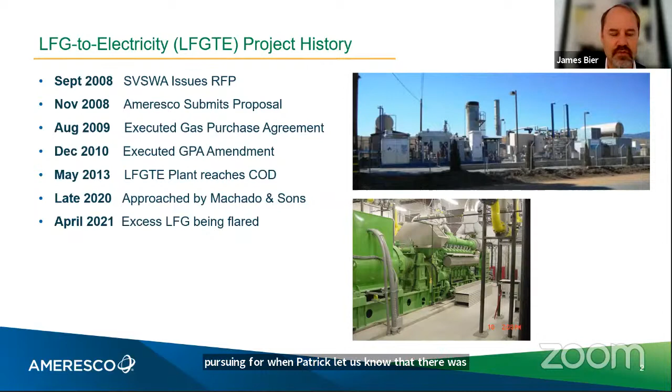Patrick talked a little bit about what the wholesale renewable electric market is right now. It would not facilitate an expansion of that existing plant. So we are looking at a landfill gas to renewable natural gas, or RNG, project.

This is a picture to the right of one of our renewable natural gas plants, actually in San Antonio. It's a relatively small plant, and the one at Johnson Canyon would be relatively small as well. We'd have a bigger footprint than we have today, but it's a lot of vessels, pipes, compressors, and things like that to remove all the impurities from the landfill gas and then inject it into a PG&E pipeline as renewable natural gas. So it's a very robust market at this time.

Ameresco is probably working on at least 15 of these projects across the country. We're one of the main players in this space, and I think within the next 2 to 3 years we will be the largest renewable natural gas producer from biogas in the United States.

So there are really 3 sources of revenue associated with renewable natural gas. One is under a federal renewable fuel standard, where you can generate a green attribute called a RIN, which stands for Renewable Identification Number. Somebody was not very creative when they came up with that acronym. But today's market for RINs is very robust, and that's the majority of the revenue you would get from this gas.

At this point, I'm going to turn it over to Sean Kilgrow and allow him to introduce himself, and then talk about how he's going to generate the biogas that we will combine with the landfill gas to make a larger project. So with that, Sean, it's all yours.

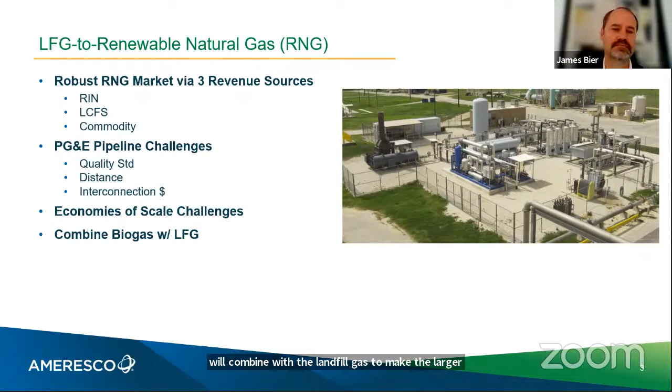Okay, thank you. You hear me okay? I can. Okay, a little bit about the company before I dive into the project. Machado and Sons is traditionally a site civil type company. We've done work in solar. Our primary customer is PG&E.

I do a lot of work up and down their service territory. I met Machado and Sons when I worked at Granite Construction. I was one of the original guys in at Granite for the renewable energy division. They were a subcontractor to me, got to know them real well, great family run company.

When this opportunity came up and we talked through it, we saw that 1383 was emerging. Even though this project doesn't relate directly to 1383, it does in an indirect manner, and we've attacked that market pretty head on. We are developing a compost site in Modesto and have other anaerobic digestion projects in development up and down really the Central Valley.

And this is the introduction to one of those projects. So we're calling this Salinas Valley Biogas.

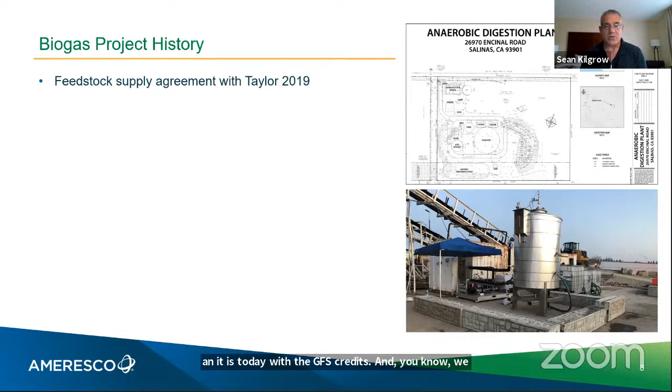The beginning of this was when I met with Taylor Farms, and we met at a Cal Recycle symposium. I have a background in anaerobic digestion going back years ago when the market was much more challenged than it is today with the LCFS credits. And we met with their sustainability group, and they presented me with this issue of the culls that they have to deal with.

When we looked at that, my first question was, well, do culls digest in a way that is going to be economically feasible? So we built the little test plant you see at the bottom there, and lo and behold, we got enough gas that we thought it would be economical to scale that plant.

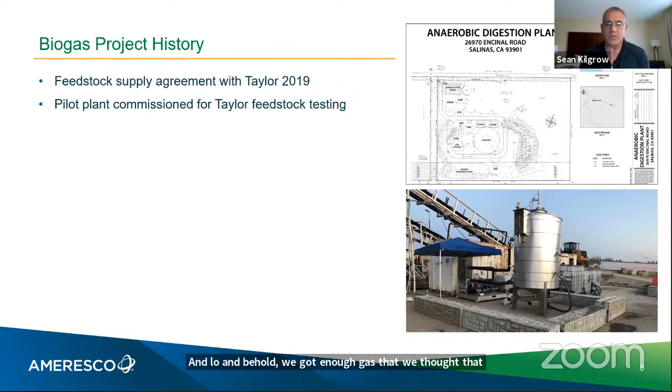What we did is we found a property in unincorporated Monterey County where we ran a full permit, full survey, geotech, did the whole thing, submitted to Monterey County with an in-vessel digestion plan. And just like Ameresco, we pumped into PG&E at that point, and the interconnection costs were just too high, and the reach of the pipeline was too far, 3 miles from the site.

So we had to abandon that site, and that's when we approached Ameresco.

So before we approached Ameresco, we did combine forces with an Austrian experienced anaerobic digestion technology provider. Their name is Biogest, and they've been great. They helped us with the permit application and the in-vessel digestion plan. You really can't do one of those without a technology behind you.

So we've built a team around this project, starting with Biogest and now sort of completing that with Ameresco, that we think is going to be a winning combination.

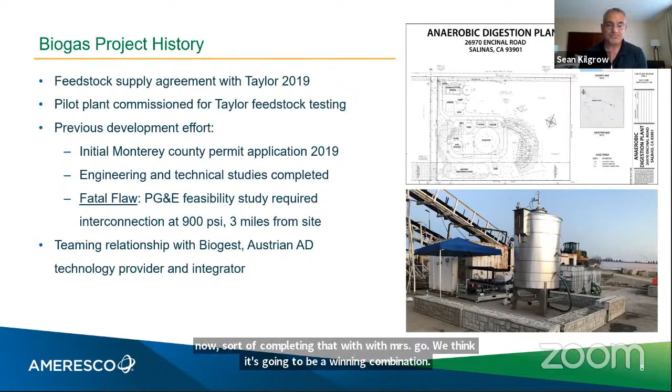And here's what we've proposed to not only Patrick but Jim. There's a site there just north and a little bit west of the landfill proper that is just about ideal for what we're trying to do.

With the amount of feedstock we have, which is 300 tons a day, it's under contract, which represents, by the way, about a quarter of what's available in the valley. Those two digesters you see there highlighted are what would handle that amount of feedstock.

But we can also expand. There's enough room there. We went out and looked at it recently, where the sort of the watermark you see there could be a third tank to include an expanded feedstock flow.

Just to give you a sense, each one of those tanks there is about 1.5 million gallons. So it's a pretty large tank. Call that 100 feet in diameter, 20 feet tall. So it's a robust, fairly large facility, but it's certainly within the bandwidth of the technology that we're bringing to bear here.

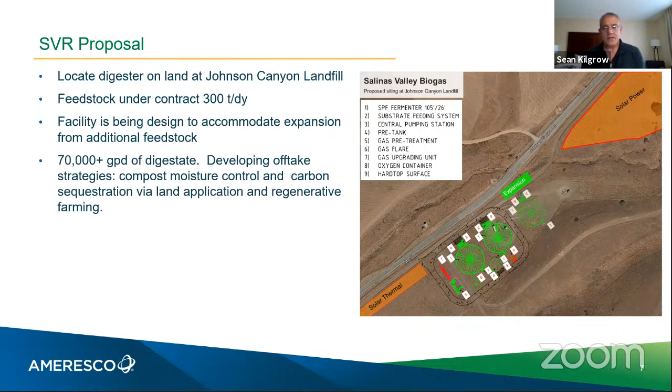One of the things we are running into is the amount of digestate that would come out of this, and that's about 70 to 80,000 gallons a day of digestate. If you can imagine, that's 2% solids type liquid.

Portion of that would go to the compost facility at Johnson Canyon landfill, and the rest of it we're looking for options. There's regenerative farming options, carbon sequestration in the soil. We've actually engaged UC Merced to help us quantify what sort of carbon can actually be sequestered in the soil. But I see that as one of the hurdles we have yet to sort of check the box on, but I don't think it's a fatal flaw by any stretch.

And the 1383, as I mentioned, it's not a direct compliance because culls are not diverted from the landfill, although those culls would not see the infrastructure that you've built to handle 1383 diverted waste. So that's the real benefit here to the landfill and to the region as a whole.

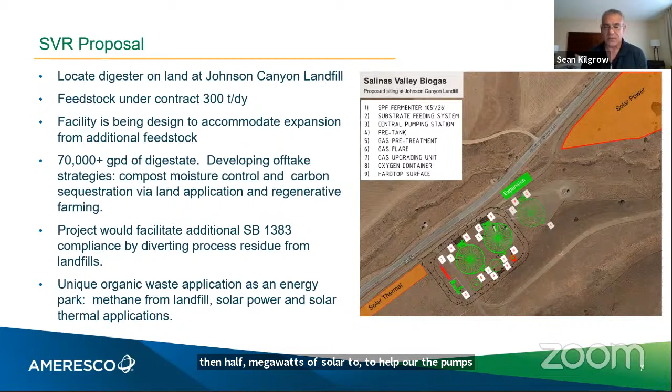As you'll see on the next slide, this is the layout we have here. The area we're proposing to lease includes not only the anaerobic digestion, but also solar thermal to maintain the heat balance in those digesters, which is key to maintaining optimal anaerobic digestion, and then 0.5 megawatt of solar to help power the pumps and infrastructure at the digestion site.

Really, the key to this slide is that there is room, and it is very appropriate for the application we're trying to accommodate here. The square footage fits very well with the amount of thermal load we have and the amount of electrical load. The larger square, 111,000 square feet, fits perfectly for the 3 digesters we're proposing. It's an ideal site for this location.

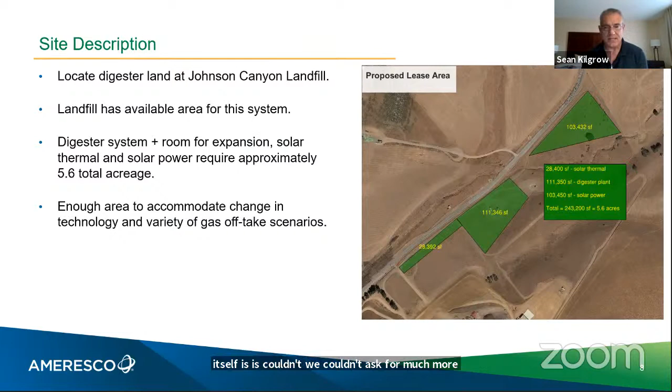Here's where we are to date. We've been working on this for a little over 2 years now. We have feedstock LOIs in place with Taylor Farm for that 300 tons a day, and we've been approached by more than one finance group. One group out of Europe has agreed that, if we check their boxes, they'll provide financing for this project.

We have an advanced design. This isn't as complicated as a landfill gas to electricity project would be, simply because we'll be providing the raw biogas to Ameresco, which makes the design much easier. For the tank design, we think we've checked the box on the latest seismic requirements, which are high in this area. The heat and electrical load are modeled and will be satisfied by the solar thermal and solar I've shown you. The detailed design and permitting effort are on hold, but once we have a blessing from this group to move forward, we can proceed with a full permitting effort.

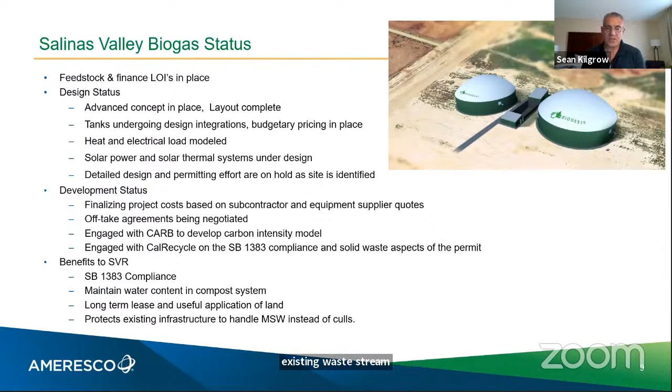This does provide the county the ability to continue with 1383 compliance with your existing waste stream. Water is always a problem in Monterey County, and we will provide enough water to maintain the existing compost system. For the county, this would be a long-term lease. Like Jim mentioned, we'd need 20 years to pay this project off, and the regional benefit of handling a majority of the culls coming out of the valley is good for the environment and the region, and creating biogas fits in line with the state's renewable energy goals.

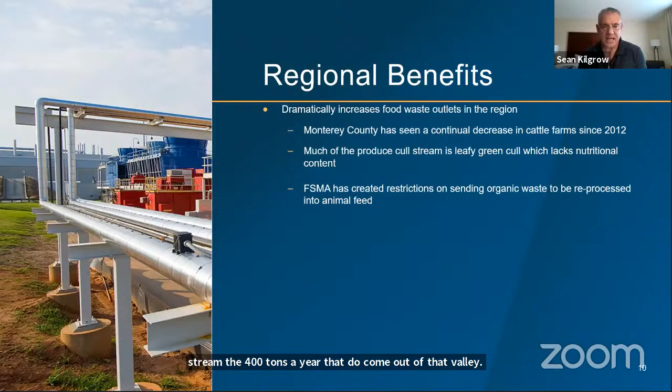This is sort of a repeat of what we've discussed, but instead of trying to build or permit additional infrastructure to deal with this waste stream, the 400 tons a year coming out of that valley, this is a very appropriate application. The regional culls here, 100% of that would be avoided, the landfill would avoid that material, which I think would be a great benefit.

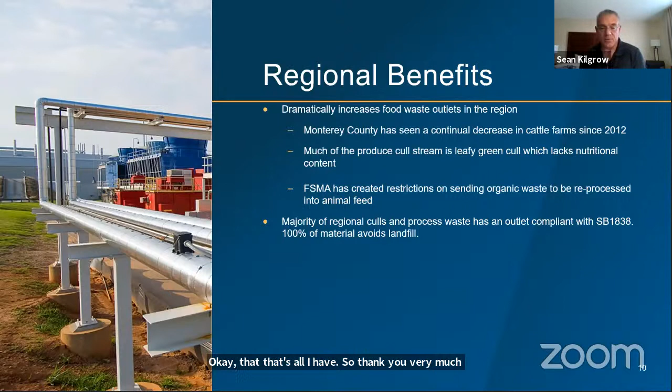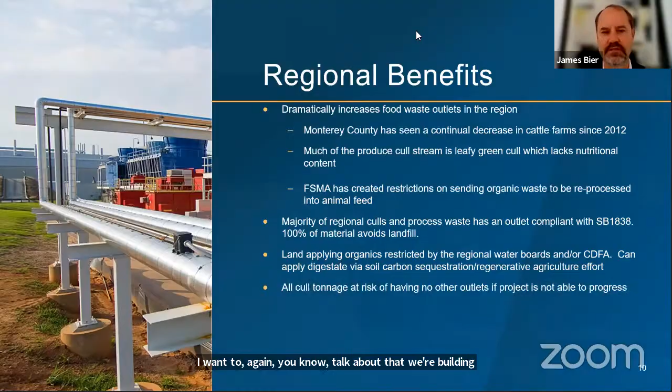Okay, that's all I have, so thank you very much. I appreciate everyone's time. Just to wrap up on the last slide, I want to talk about building on the successes we've had with the authority over the last decade. This is really expanding our presence and our relationship with the authority, and we look forward to it. I started off this presentation with a reference to a marathon roller coaster ride, and I don't think this project will be any different.

Hopefully it won't take 5 years. I don't think that it will, like the previous one, just because we know each other a lot better.

But I do want to warn the folks on this phone call that this is a marathon roller coaster ride, and that today we are closer to the start than we are to the finish. But Ameresco and our team and our partnership with Machado, I think is the right team to bring this project to fruition. And I look forward to working with Patrick and his staff and the members of the board in bringing this project to fruition. So again, I welcome questions as well.

Thank you, Sean and James. I'm going to see Patrick. Any other thoughts for us before we go to the board?

You're on mute there, Patrick. Yeah, just one last thought, and this does have to do with the city of Gonzales, as many of you know.

It is deep in development of a microgrid. I participated or listened in on a webinar today put on by the local government Sustainable Energy Coalition, and really it was all about the Gonzales project, and they continue to identify the landfill gas, biogas as a possible future source for some of their energy needs in their expanded business park. So we are keeping that in mind.

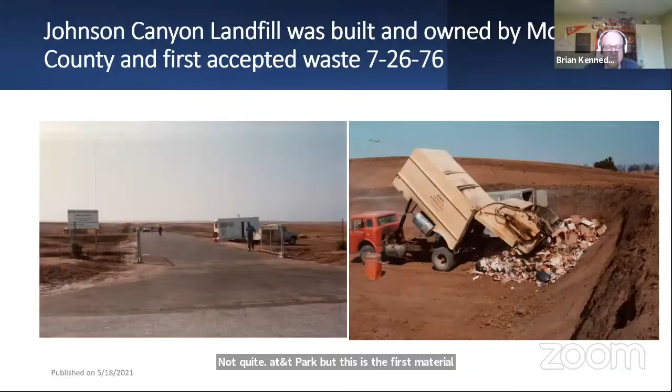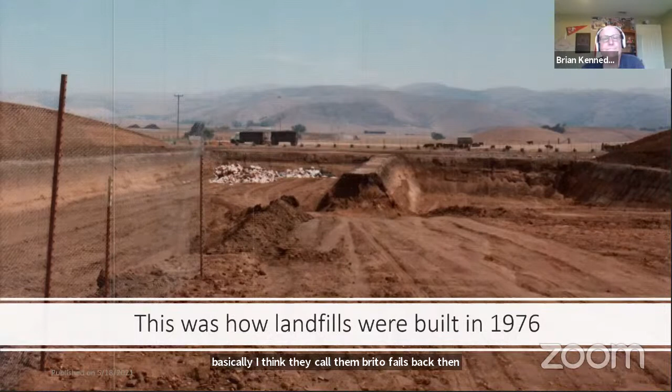So this is how we were landfilling in 1976. It was basically, I think they called them burrito fills back then. You would just bulldoze out some troughs and fill the waste in there, and we would cover it. Next slide, please.

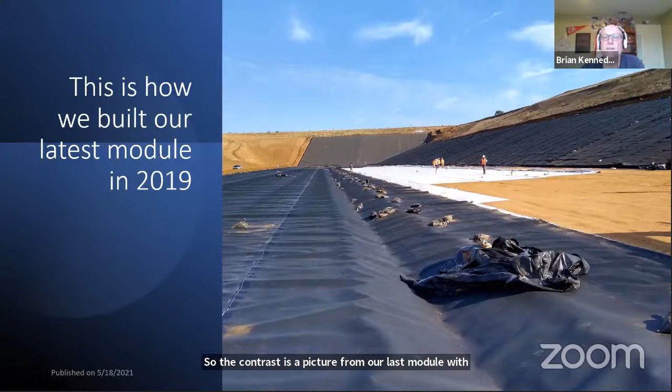In contrast, this is a picture from our last module we built, which is module 7 in 2019. You can see quite a bit of difference there as far as the environmental protection. Next slide.

So modern landfill designs have many features to prevent environmental degradation. Leachate, which is liquid that comes in contact with garbage, is protected from, or prohibited from going into the environment. There's a multi-layer baseliner which is used to prevent this leakage, and the collection system with pumps that remove the leachate. When the landfill is closed, a similar liner system is constructed on top of the landfill to keep water out and prevent landfill gas from escaping into the atmosphere. In the case of Johnson Canyon, this gas, as you heard earlier, is used to generate electricity, as well as some of it now still being flared off. Next slide, please.

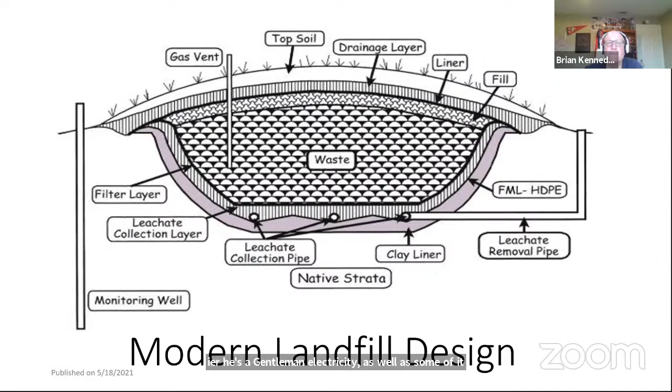One of the things we want to talk about tonight is the master plan. The master plan is a document that examines the short, medium, and long-term goals of the site, including modular design and sequencing, stormwater controls, and site closure design and timelines. Geologic Associates was retained to develop our latest master plan a couple of years ago, and the final plan is included in your board packet today.

Johnson Canyon has had 2 previous master plans, in 1986 and 2004. Master plans are typically done every decade or so. They're not required, but sites use them for planning purposes primarily, and you initiate them when you have different circumstances, different waste streams, different objectives. Next slide, please.

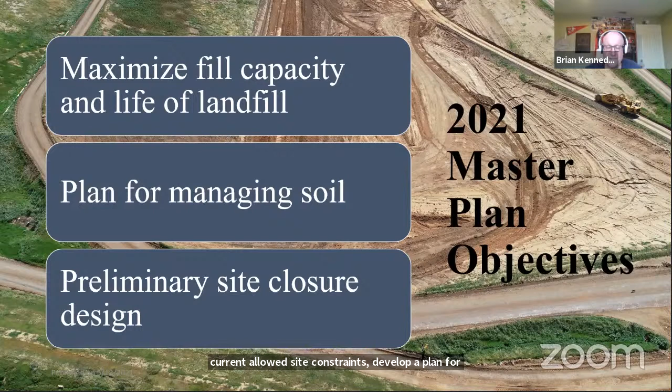So the objectives we gave to Geologic this time around were threefold: we wanted to maximize the lifespan of the landfill within the current allowed site constraints, develop a plan for managing the excess soil on site, and develop a preliminary closure plan. Next slide, please.

So the constraints on landfill capacity include the proximity to the property boundary, the height restrictions agreed to in the conditional use permit in 2007, and actually the weight of the waste on top of the leachate collection pipes themselves. Next slide, please.

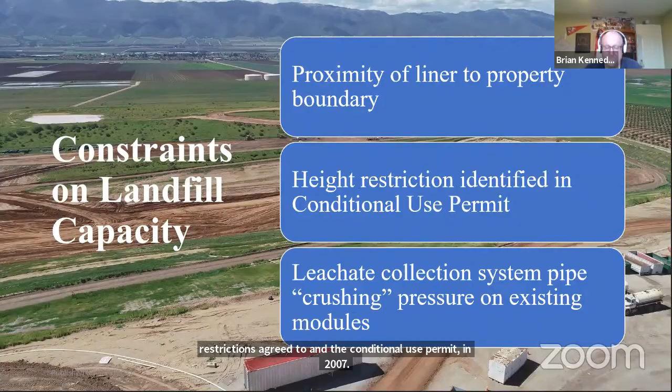So some highlights from this year's master plan. Development plan shows 3 remaining landfill modules for a total of 10. This is the same as we had previously, just a little bit larger.

And then we maximize the footprint of the landfill, which extends the life of the landfill. The design also added more contours to the final top deck to facilitate stormwater drainage and make the closed landfill fit in better with the surrounding landscape. However, the increase in capacity resulted in a whopping 2.6 million cubic yards of soil that needed to be managed. So the good news is Geologic came up with a plan to manage that soil.

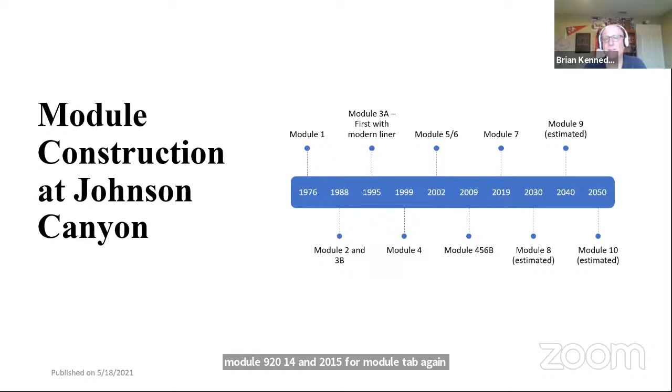As far as the module construction timeline going forward, we finished Module 7 in 2019. Module 8 is estimated in 2030, Module 9 in 2040, and 2050 for Module 10. Again, these are estimates based on current disposal rates.

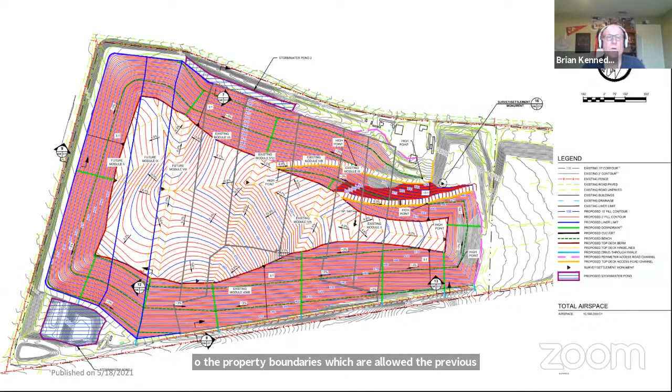So here's a design of the final map of the landfill after it's filled and closed. The waste limits on the north, the south, and the west are much closer to the property boundaries, than were allowed in previous plans. And then the top deck is a lot more contoured, fitting in much better with the surrounding landscape after closure.

So now we have the issue of the soil challenge. We have 2.6 million cubic yards of dirt, and we have to manage this. We can't stockpile it on site, there's no place to put it. And if you shipped it off site, it'd be very expensive. So we look towards our closure plan.

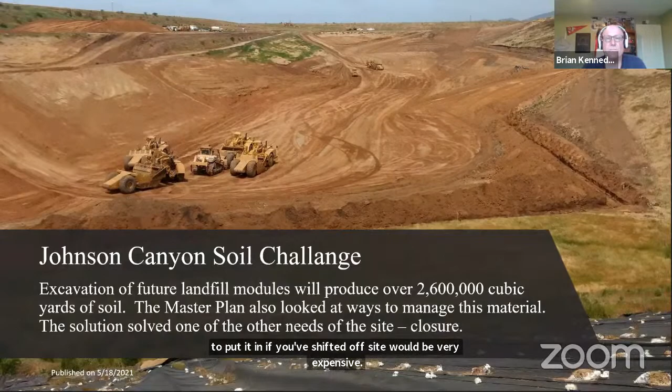So landfills are closed as a regulatory requirement. The idea is to isolate the waste from the environment to reduce water infiltration, manage gas and stormwater. And the site must be managed for 30 years plus after it's closed.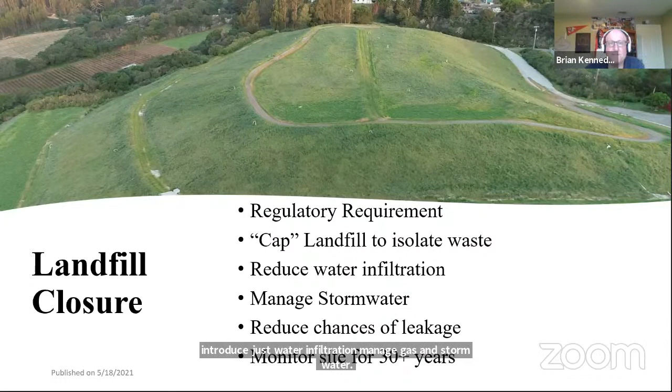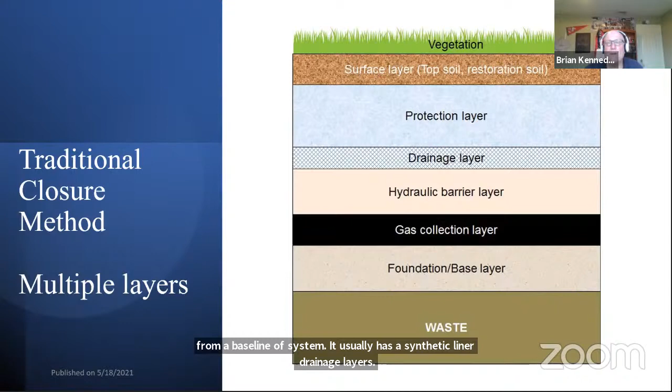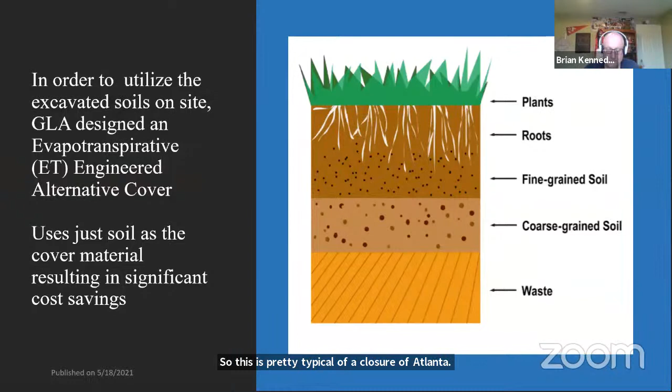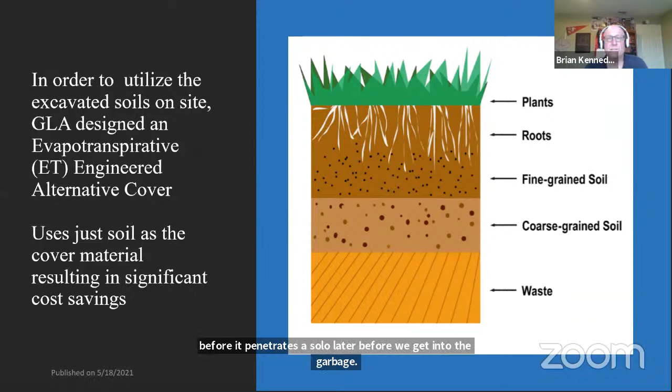So the regulations allow for what they call an engineered alternative to the standard closure design, and Geologic came up with what's known as an evapotranspirative, or ET, cover system. This design uses 4.5 feet of just soil on top of the landfill, and the idea is the stormwater is absorbed by the topsoil and will evaporate before it penetrates the soil layer and gets into the garbage. This is the same system we used when we closed Jolon Road in 2007.

These ET covers are gaining popularity, but they really only work well in arid and semi-arid locations. If it's a wet location, they don't function as well and usually don't get approval from the regulatory agencies.

So one of the great benefits of the ET cover is the cost over traditional cover systems. The estimate over the previous closure cost estimate shows we've saved over $8 million. We haven't saved it because we haven't spent it, but the estimate is $8 million less with the ET cover over the traditional cover system.

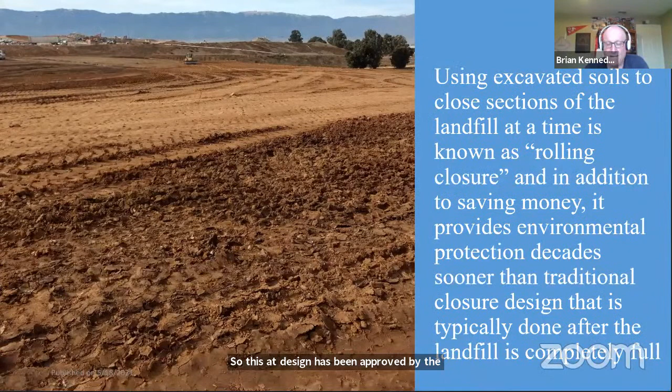So the plan is to use the excavated soils from the future modules to close sections of the landfill as we go along. This is called rolling closure. It gives us the benefit of the environmental protections that closure provides long before a traditional closure would, and it allows us to manage our soil on site rather than having to export or stockpile it. This ET design has been approved by the water board, and we're waiting for final approval of the closure plan documents to potentially begin this process this summer.

That's it. Any questions?

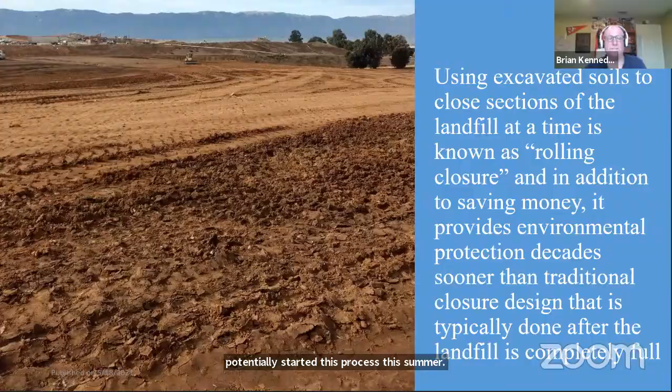Thank you, Brian. I see a hand up from Rob. Rob, floor is yours. First off, thank you, Brian. That was good information, interesting to see all of that. We've seen bits and pieces at a time, but to have it all in one spot, that was interesting. I'm curious on that.

A couple questions related to those estimated closure costs. One is, is that in terms of today's dollars or future dollars? Kind of thinking about what exactly those numbers represent. And then, that's a huge delta between the ET method and the traditional method, if you will.

Why is it such a big difference? Well, the synthetic liner, like the system you saw from Crazy Horse, the materials are expensive. Preparing the subgrades is very expensive. Putting in the drainage layers, the materials alone are really expensive. Plus, you would likely do that all at one time, and there'd be a major construction operation, with a lot of CQA costs doing the rolling closures. We're basically getting our design plan approved now that we're going to be using for the next 40 plus years. So there's savings in that.

And back to the cost estimates, we estimate them every 5 years, and they're based on current dollars. Those numbers will change, and all this will change. We've got quite a bit of lifespan left. This plan going forward will be used as a blueprint, but the numbers, the disposal rates, the disposal types, these things are dynamic. So today, 2021, this is how it looks. How it looks in 30 years from now, I probably won't be speaking to that.